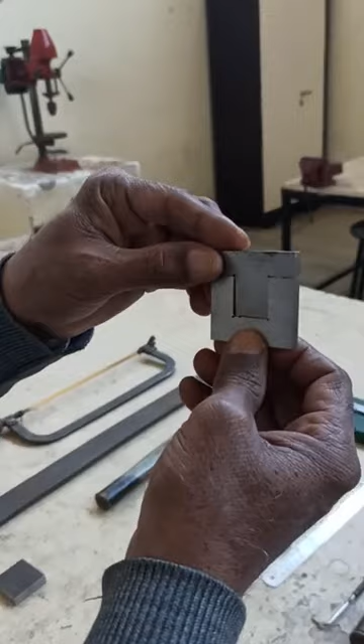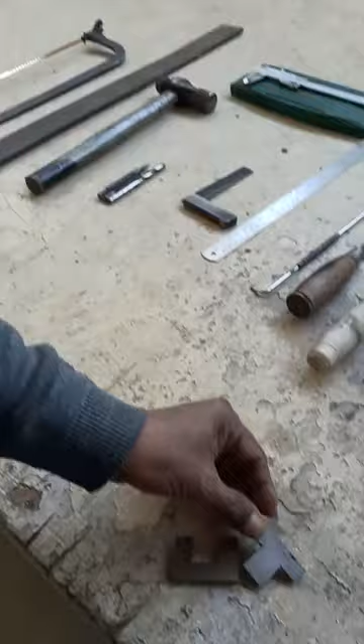So this job is in two parts. One part is T and we call the other part U. So the part T we are making today, and here are the tools and instruments which we are going to use in this job.

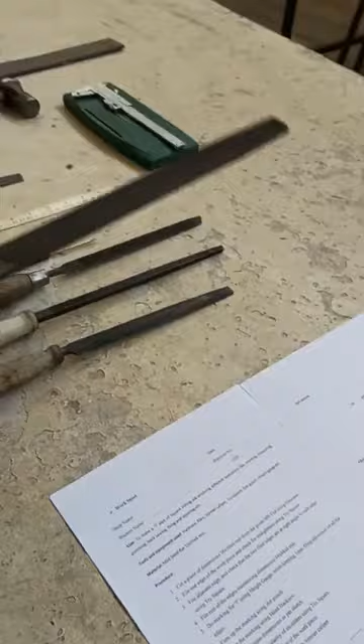So here we have this, we call it a file. It's a rough file, or we call it bastard file to be precise. And this is smooth half round file. It's a square file to make shouldering - it's like this, we fit it here. And there is a triangular file just to empty the corners so that there is no interference with the other part, the U part.

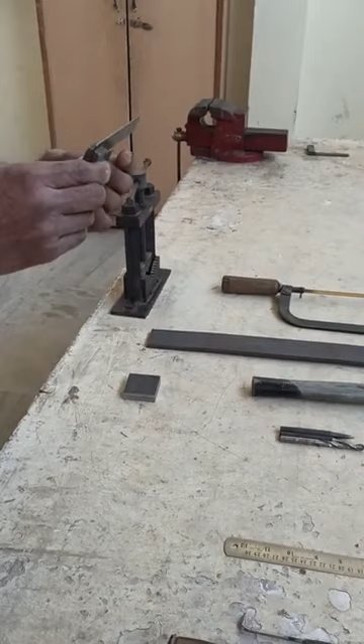And we have scriber for marking lines. There is steel rule and tri-square for checking right angles. And there is a drill. These are punches for marking, we call them prick punches. There is a ball peen hammer. And here is the vernier caliper for linear measurement.

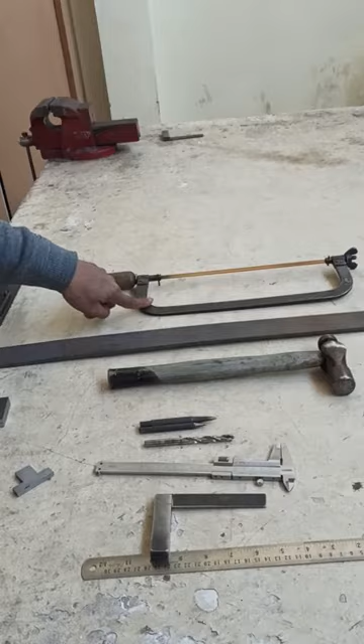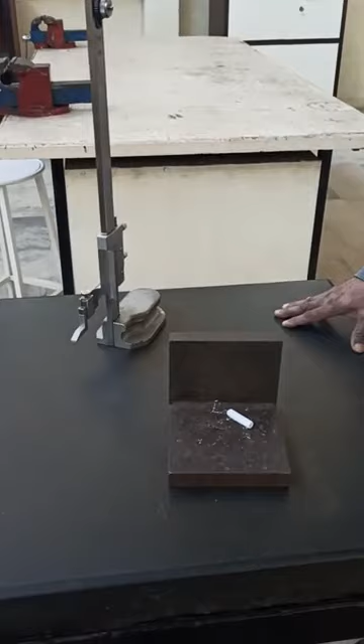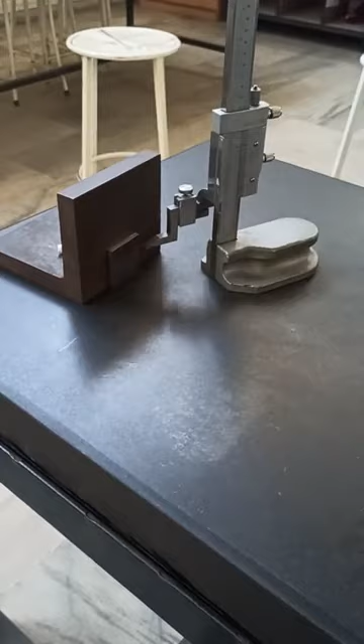Hacksaw for sawing, and here we have a vernier height gauge placed on a granite top surface plate, and this is the angle plate for supporting our workpiece. So we will put the workpiece here like this, and we will use the height gauge for marking. This we will show in the subsequent time.

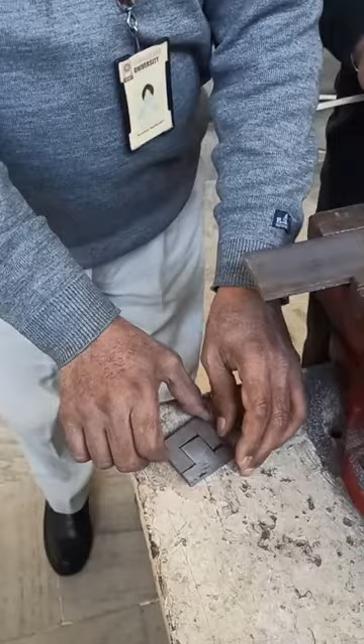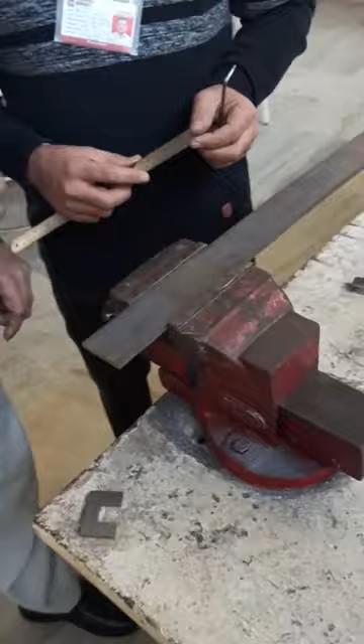T part of the job, which is a square fitting job - it's a part of the square fitting job like this. So we are making T today. So we will cut the raw material from this given 50 into 6 mm flat. So now we'll do marking and then cut the raw material for this workpiece. Please cut, mark and cut.

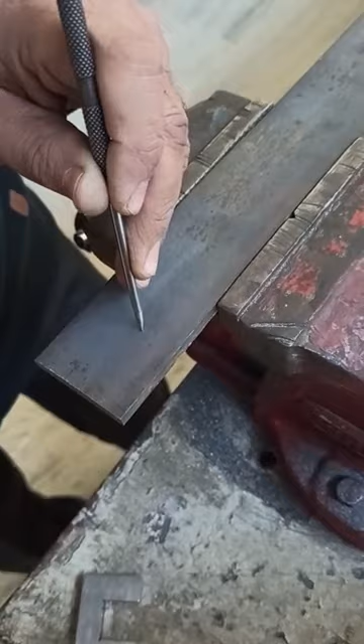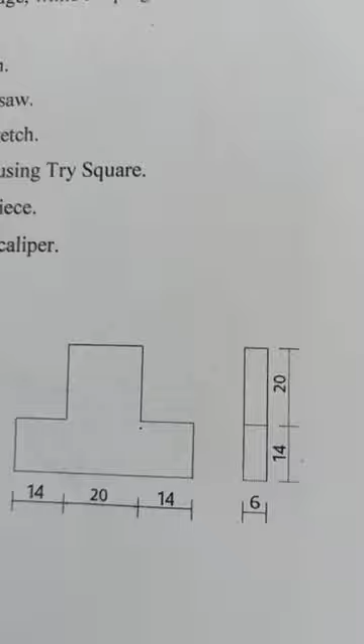The final dimensions are 34 and we are taking it as 36. Right.

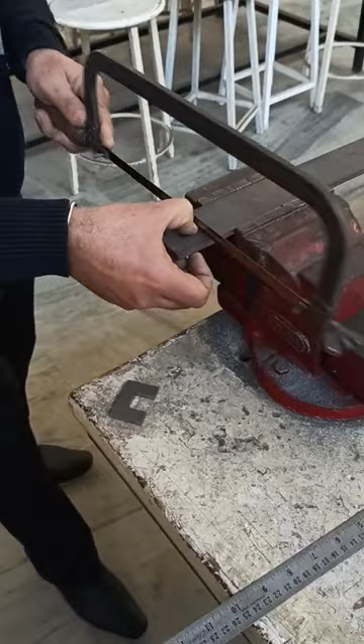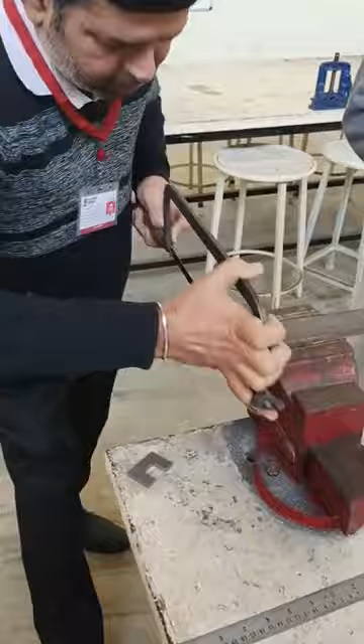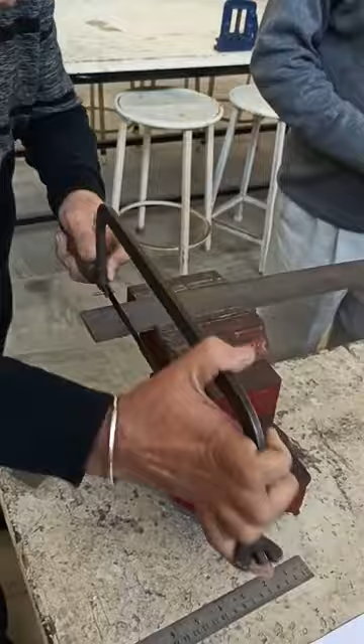So now he will be cutting with the help of hacksaw. So in this cutting operation, the forward stroke is the cutting stroke and the return stroke is the idle stroke.

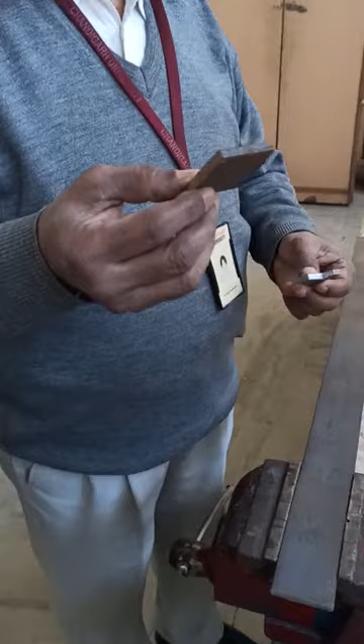So here is the raw material for our workpiece. We have kept 2 mm allowance for filing on all sides. So now we'll begin with filing 2 adjacent sides to make it a rectangle.

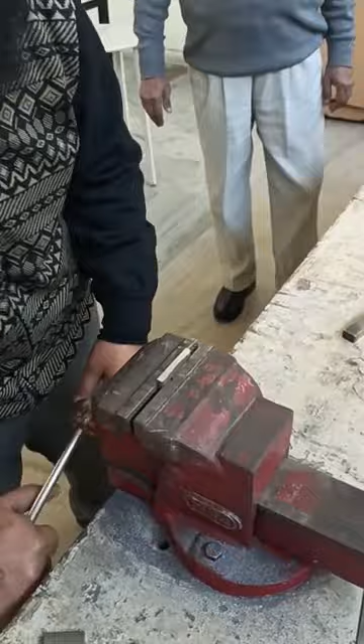So now this is the filing operation. This operation is performed to make one surface straight.

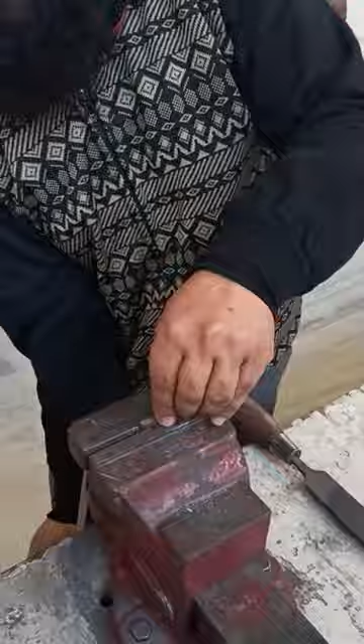Now he is filing the adjoining side, the adjacent side, adjacent edge.

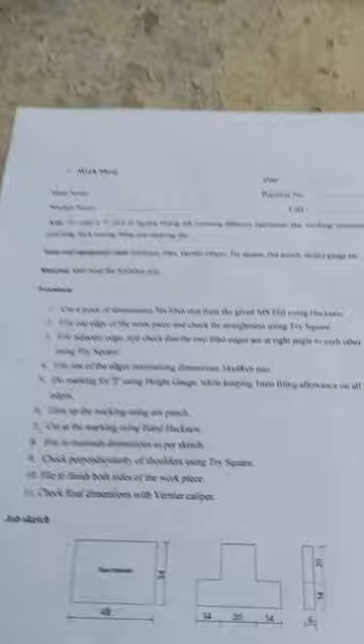So to make the T part, we have to convert it into a perfect rectangle of 48 by 34. This raw material size is 48 by 34, and it is to be converted into this T section.

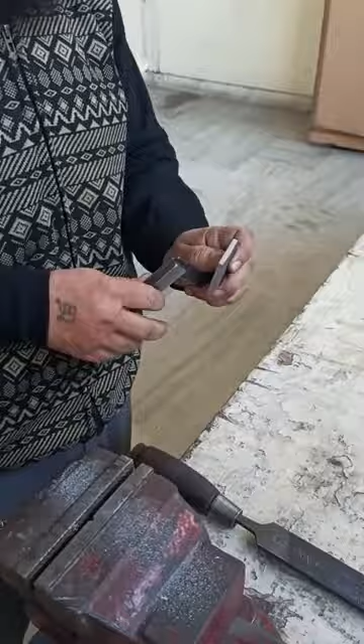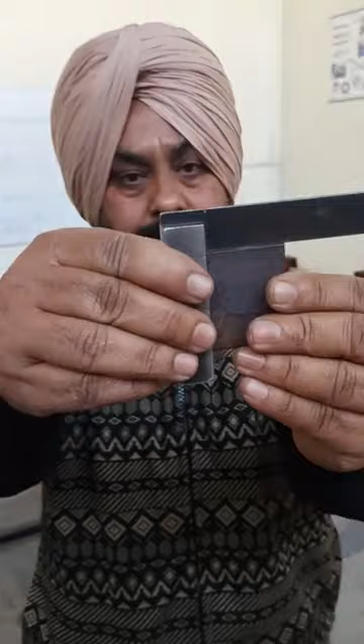Now he will check the straightness using the try square. We have to ensure that two sides are at right angle to each other, perfectly 90 degrees. Now we'll proceed to make the other 2 sides right angle to each other, so all 4 sides should be at 90 degrees.

So now another edge is being held into the bench vise. At the same time, we'll ensure that the final dimensions are 48 by 34. Finally, we check by vernier caliper - the dimensions are okay.

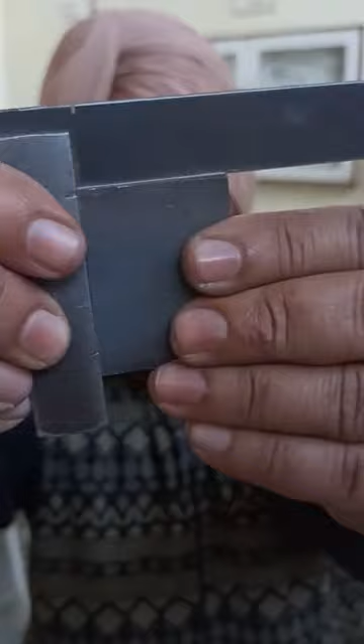Right, now you can see two sides are at perfect right angle to each other. Now the last side, the fourth side edge.

Now the fourth edge is almost complete. Now once again he will check the straightness using the try square for this fourth side edge also.

Now the filing is complete, I think. Now we have to check two things: one is straightness and second is the size. Size should be 48 by 34.

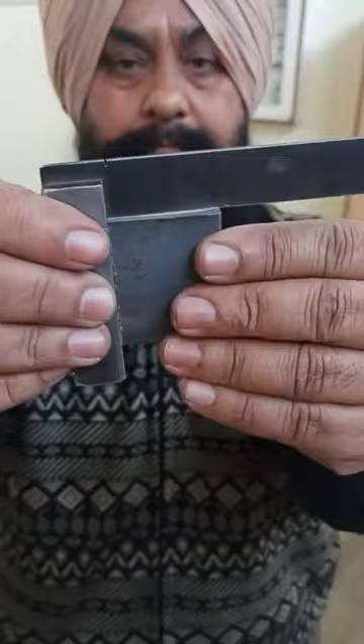Just a slight difference in right angle. So we have to once again file at the right corner of this job.

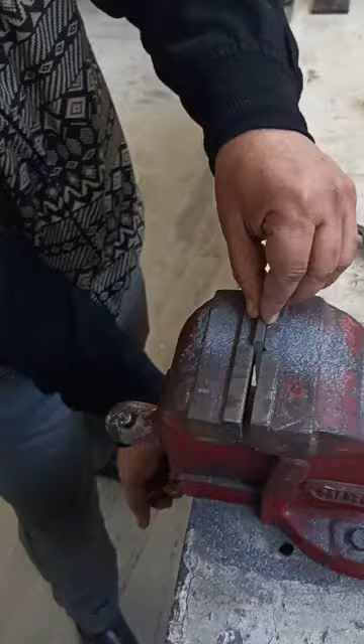Now once again checking the straightness. Now I think it is okay. Now check the final dimensions using the vernier calipers.

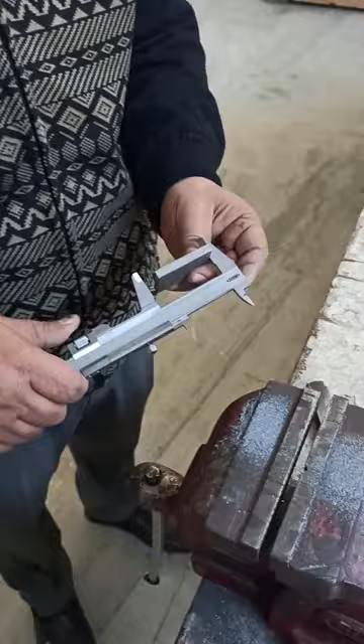Next one, next side. Now he is checking the final dimensions, 48 by 34.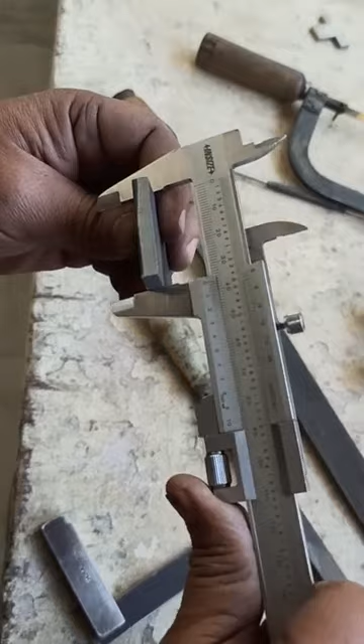Sir, how much is this? Show the reading on the caliper. This is 48. Okay, so the other side - it is how much? 34. Okay, so the size is okay.

Start. Now we'll mark the workpiece for cutting T. So we'll use the vernier height gauge. This is the T part which we have to create. We'll make marking for the T part now.

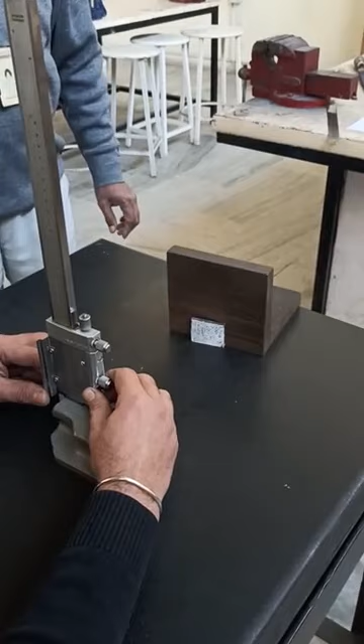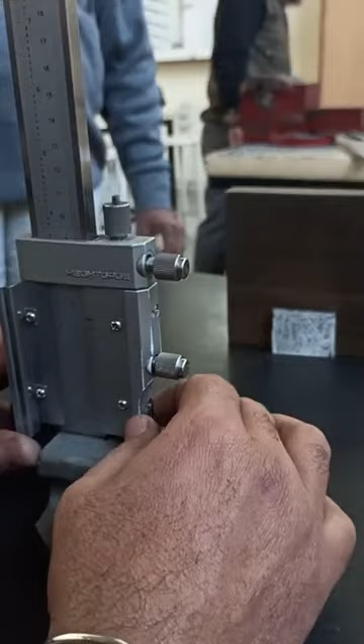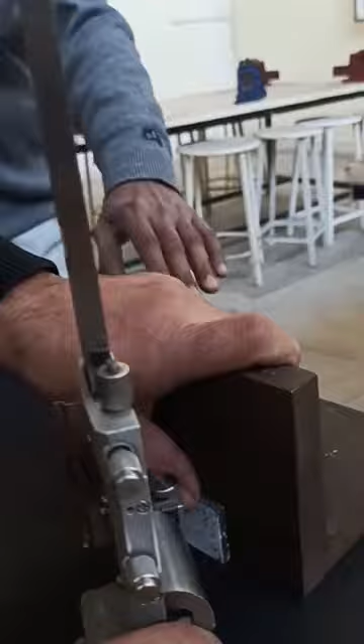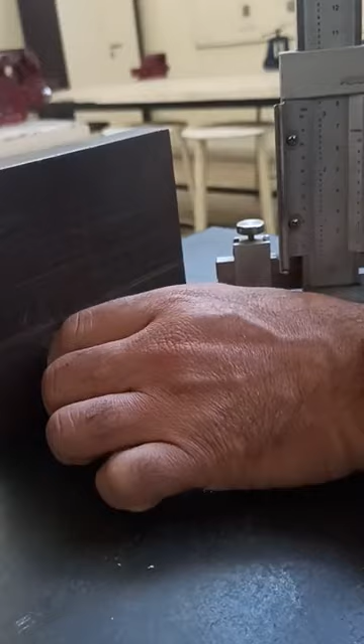So this is the vernier height gauge. Here it is set to 0. 14 millimeters. Show me once more - 14 mm.

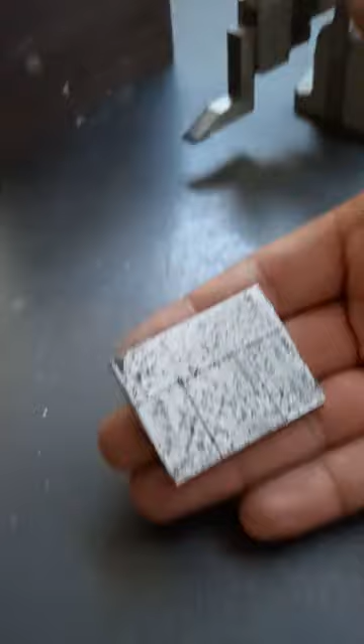So with the help of the vernier height gauge, he has marked these dimensions for the T, 14 mm on each side. And now we will firm up these lines by using the prick punch. Okay, let's do the prick punching.

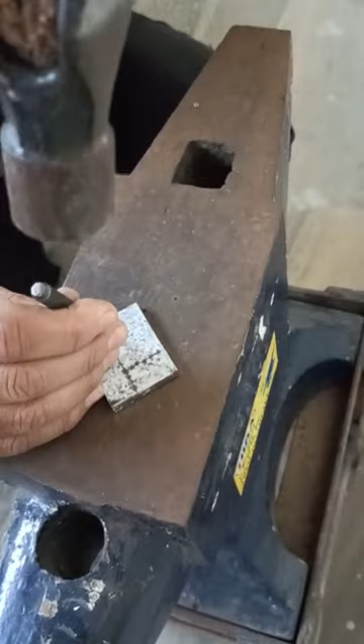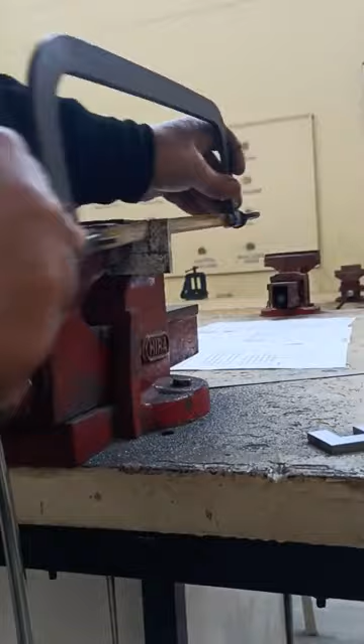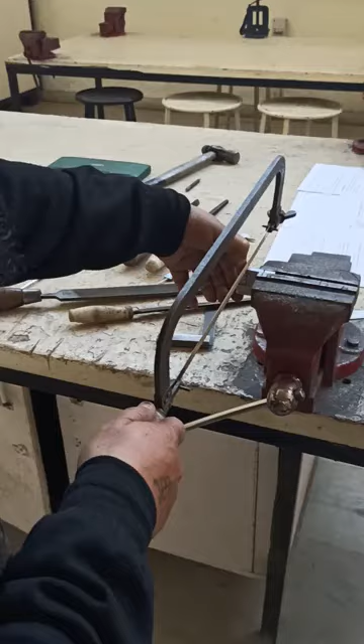Now we are fitting it into the bench vise to cut at the marked punches, according to the marking on the plate. Now he is cutting the other side.

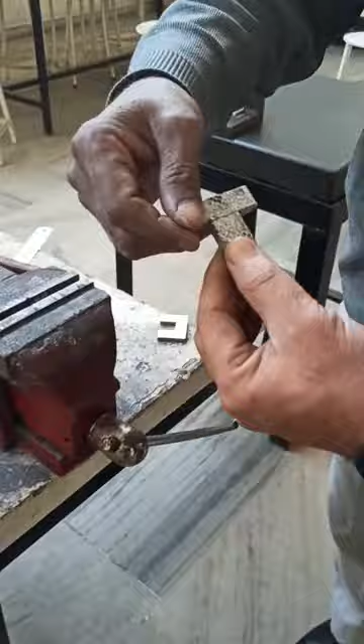So this is our job now, after sawing off the extra material. So this is the rough T before filing.

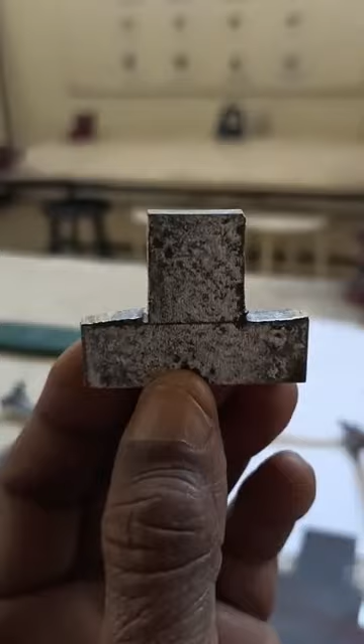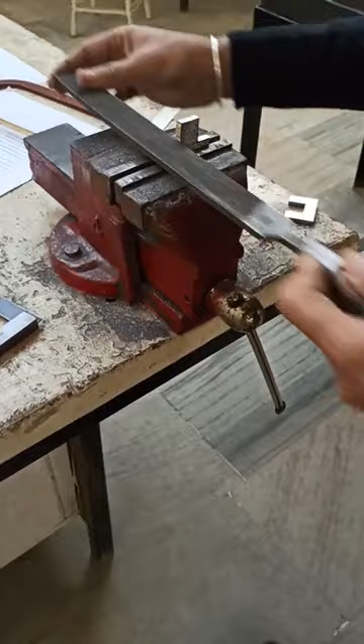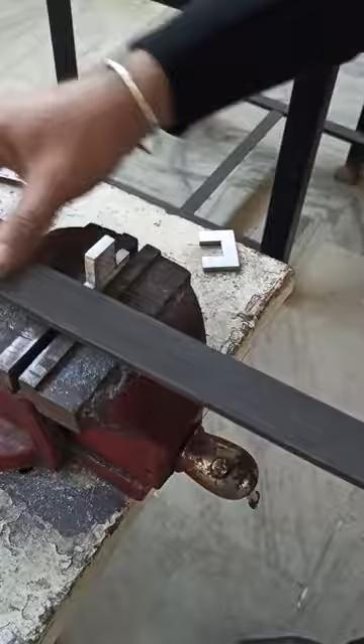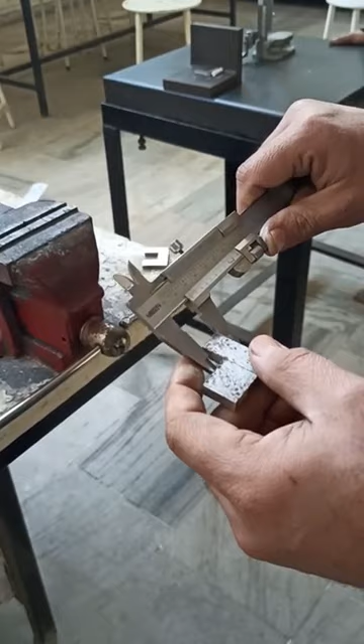Now we are starting with the filing of the sides and corners of this T. 14. 14.

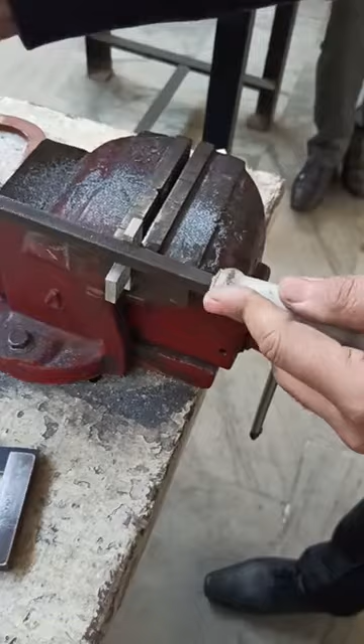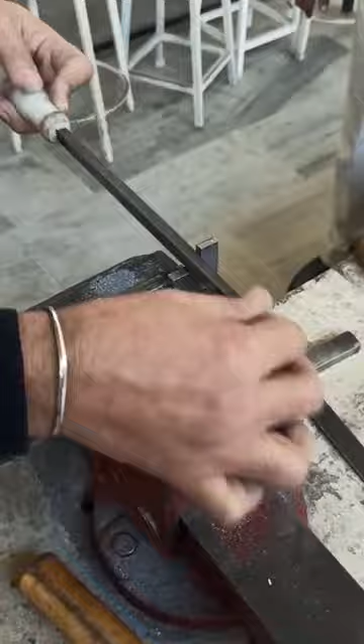Now he is finishing the corners with the help of the square file - this operation is shouldering. Now once again he is finishing with the square file, the shouldering operation, to finish the corners.

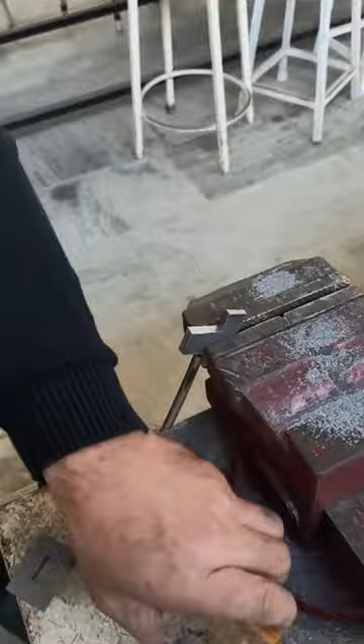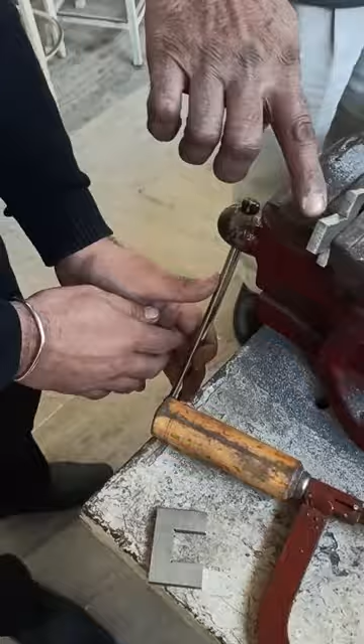For fine finishing he is using the hacksaw to clear the corners of extra material, because it has to fit into the U part.

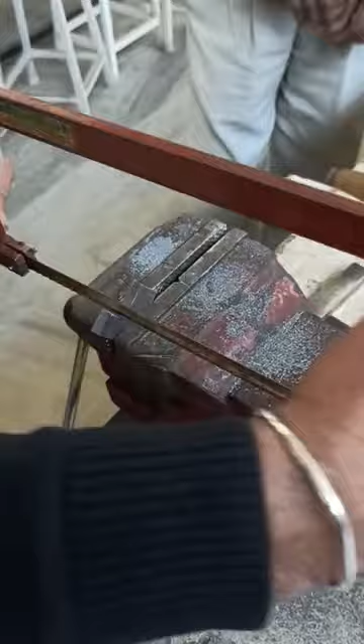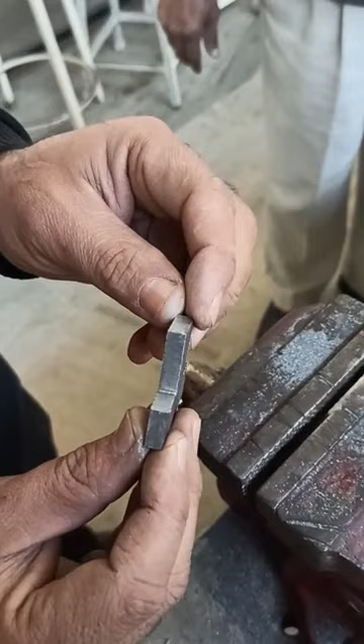It is a square fitting job, so the corners should be clear. Both the corners are clear.

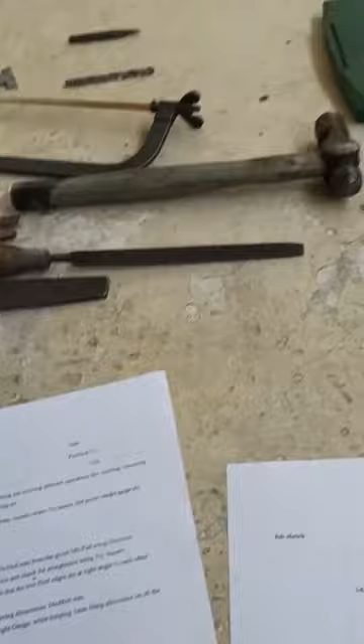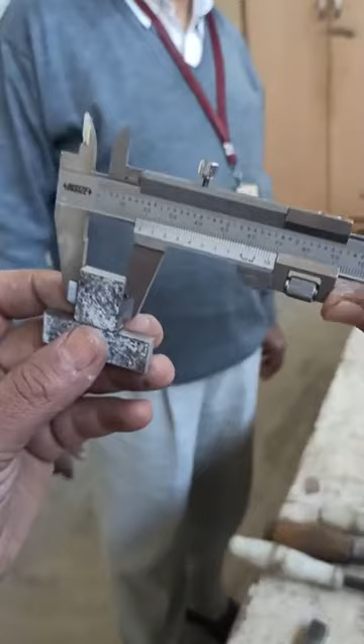Now we are checking the size of it. The size is 20. This size is 20. 20, done. And here it is 14.

14, this we have already measured. 14, this is again 14. So now this is the complete T part. 48, this should be 48. Yes, this is 48. 34, 34.

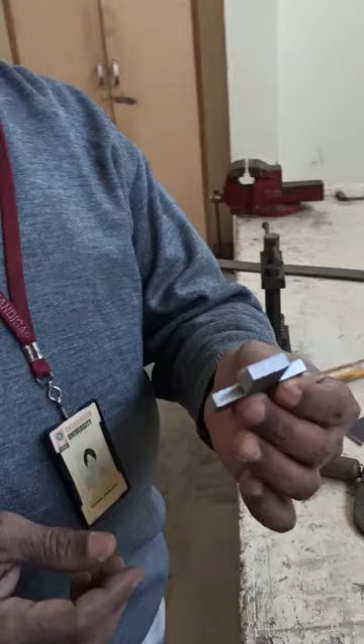Except for the finish filing from the sides - that we will do at the end of the operation. This will be the last operation, when we have made T as well as U, and will file them together. So that will be the last operation. This practical is complete now.